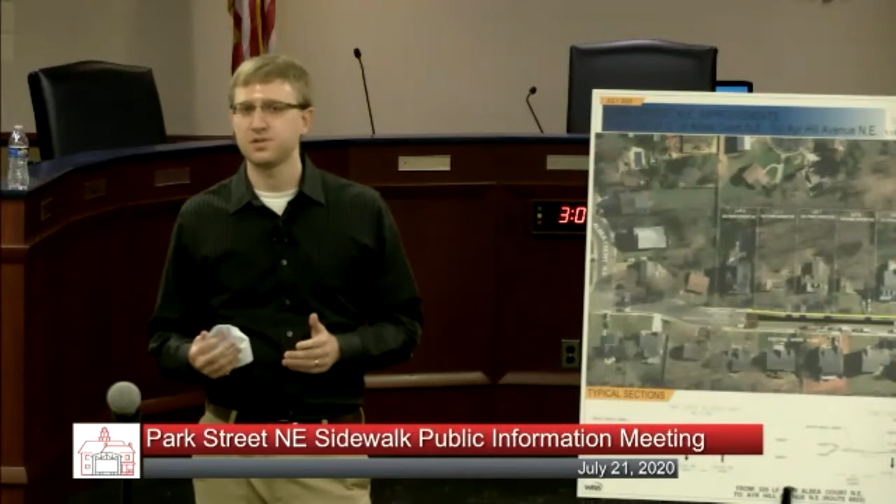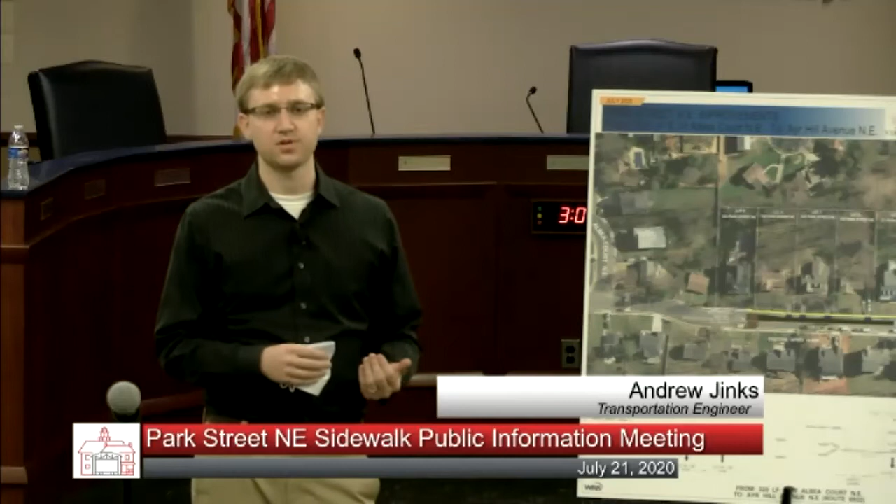Next question, from Nathan: will there be improvements to the sidewalk at the Ayr Hill and Park Street Northeast intersection? And can the power lines be moved underground during construction? To answer the second question first, moving power lines from aerial to underground is very expensive and costly, so that's not part of this project. For the intersection, we will be improving the curb ramp on the west side, but just that one side of the intersection. We won't be ripping up the concrete apron to install that, just improving the sidewalk and curb ramp in that quadrant.

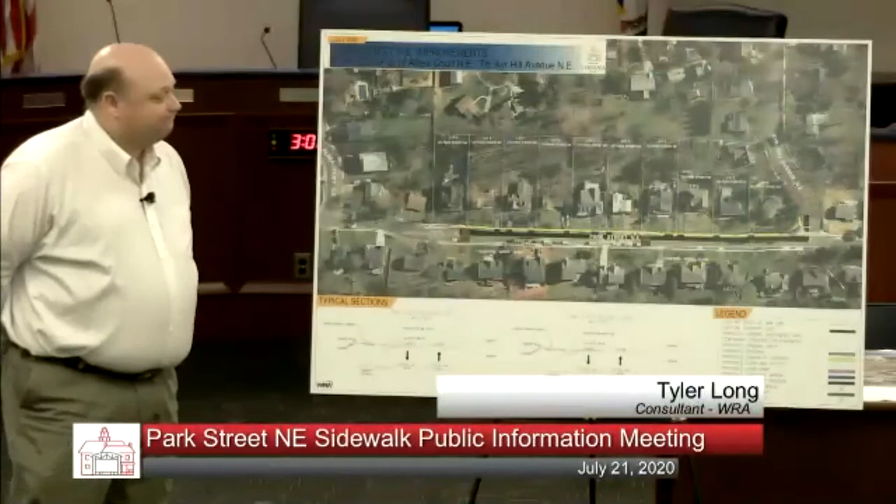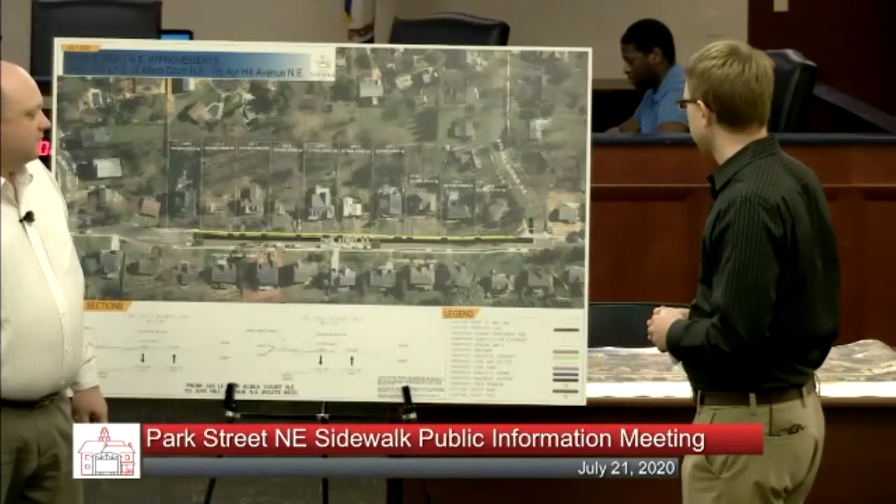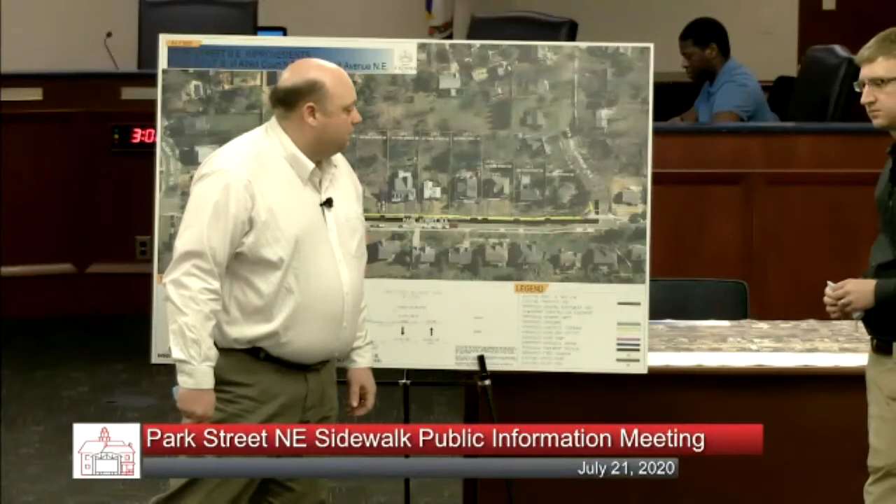Nathan asks: are you connecting the crosswalk across Park Street? The existing sidewalk on Park Street ends at the bottom right of the screen with nowhere to go. Will it connect? There's an existing curb ramp for a crossing, and we're lining up the new curb ramp to be in line with the existing one between these two driveways in this area. But there's no crosswalk or anything to safely get across during rush hour.

There aren't any marked crosswalks there currently. That's something the town could look into, even outside this project, so we can definitely look into adding a crosswalk and the markings as this project goes under construction. That intersection is pretty difficult for pedestrians during busy times and during Vienna events. I'm glad you let me know, we'll definitely look into that, I'll put it on my list to add pavement markings.

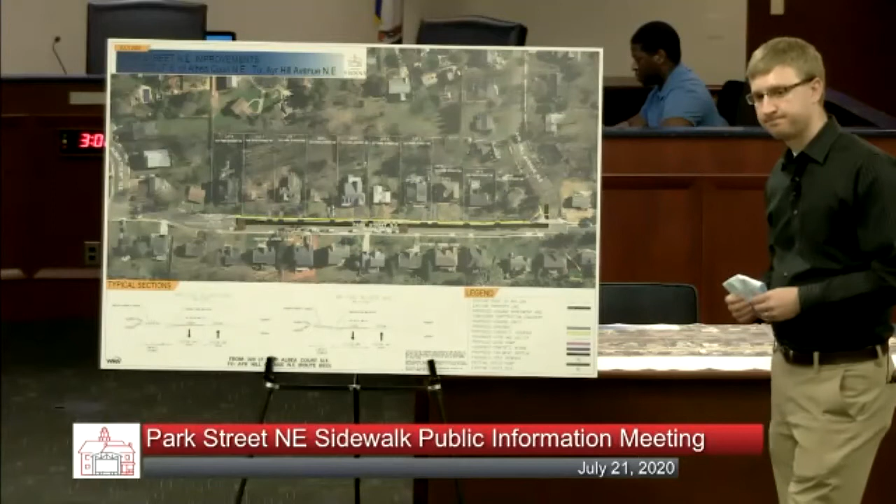Charles, was there any other questions? Not at the moment. Okay.

We'll be here for a while. I just want to have residents have some time to take a look at the exhibit. I'll check back in maybe 5 or 10 minutes to see if there are any additional questions. Could you remind everyone where they can find the packet of information?

Well, there are 2 places. First is the calendar event for this meeting. The other place is we've got this exhibit located on the project website. We are going to go through and update the project webpage for this. I know the dates on there are a bit old and outdated. We're going to update that, especially after we get our review comments back from VDOT and have a better idea of what the schedule is going to look like.

So please take some time to take a look at the exhibit and let us know if you have any questions.

So who is asking that question? This is for Michael Cooney, I hope I said your name right. My email should be part of either the project website or the calendar event. Send me an email, just a reminder of the question about the construction times versus the other developments being constructed, and I'll get back to you. But yeah, that's a good question. Thank you.

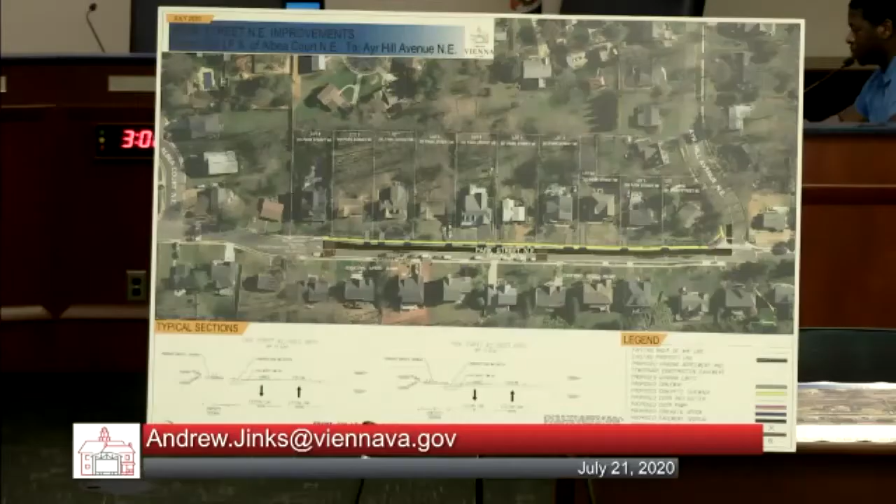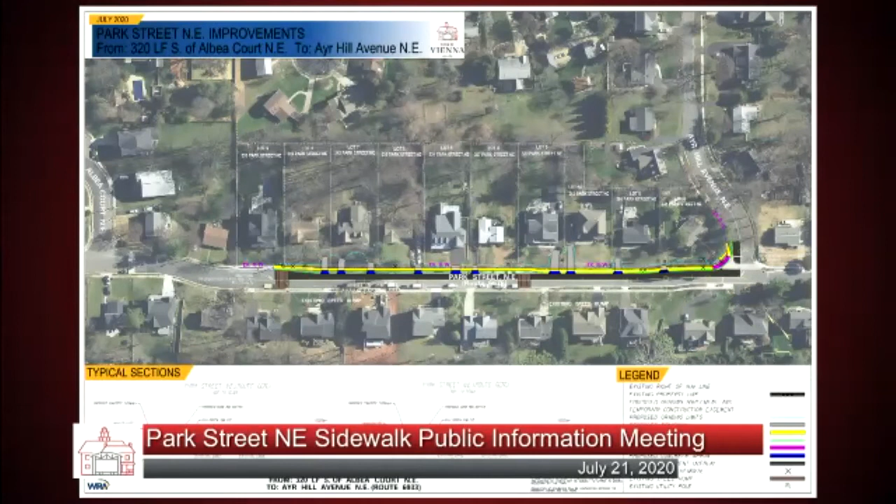Lisa would like to ask a question, so she's coming off mute. Hi, this is Lisa Cooney. I live across the street from Ayr Hill, right at the base of it. It looks like, when I went out there and walked this, that the trees that are going to be affected are all the ones along that house on the corner. Is that right?

Yeah, so currently 3 trees are showing being impacted on that property. But I know one of them we may possibly be able to save once we refine the design. At this point, we're showing 3 impacts.

Are those on Ayr Hill or Park Street, or both? Well, one of them is kind of right in the middle of the two, and the other two would technically be along Park Street. Okay.

At what point will you know the impact of the trees due to grading, etc.? At the time of construction, or at some earlier final design phase? It'll be at an earlier design phase. We're approaching 90% now. After VDOT goes through and does another review, we'll be able to finalize the design. At that point, we'll be able to know the exact impacts to the trees. Is that correct, Tyler? That's correct.

There's a follow-up question. It sounds like there would be time to discuss mailbox impacts as well, correct? Yes, we can discuss mailbox impacts when we have that one-on-one conversation with residents during the right-of-way phase. That's a good question, and we will be able to discuss that at that point as well.

This is from Michael. Has there been any analysis as to what effects this might have on parking during Viva Vienna? I don't think we've directly looked into that, but this design does not allow parking along the roadway there. That's something I could look into, understand how many people usually park there during the event, and get back to you. If you could send me an email reminding me of that question, I could get back to you. Thank you.

Did you say that it does or does not allow for parking? So along with the addition of the curb, which we need for drainage purposes, there would be no street parking along that side of the street.

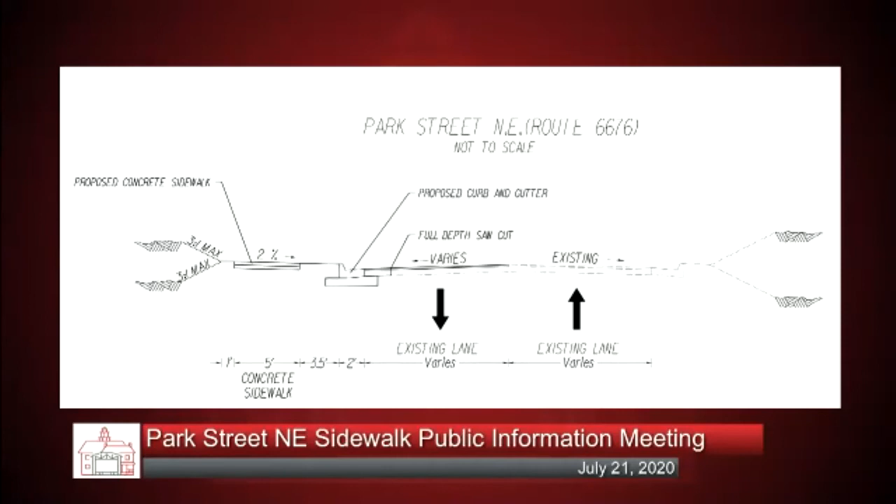I think Nathan wanted to speak. Hi, yeah, this is Nathan Giesman again. So on the no parking on that side of Park Street, is it going to be official with signs that there's no parking allowed on that side of the street?

We typically don't sign that, but that's something I could look into. With the way the road is laid out, it'll show just a single lane there, so I'll look into whether we need to add no parking signage along there. But with the addition, there are quite a few cars that park along the street right now, and I imagine there are going to be a lot of people who need to know that, who are likely not aware that this is going to be an issue.

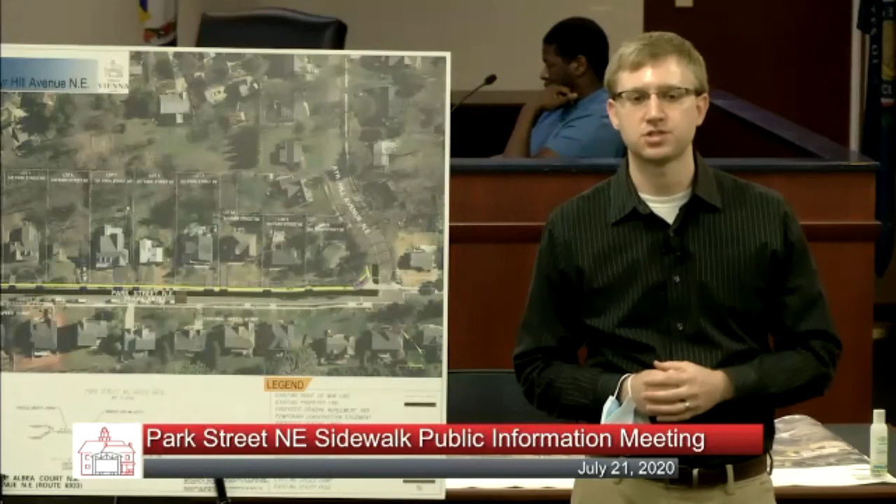But as I mentioned a couple of times, our next steps are to submit plans to VDOT within a week or two or so, which are going to be the right-of-way plan sets, the 90% plan sets. Once they review that and get back to us, we'll be able to start the negotiations with town, the residents that are impacted by this project. So look for us to be reaching out to you maybe in a month and a half, two months from now, just to get the project continuing to move forward.

I do apologize for various delays that have been a part of this project. The virus situation is one aspect, but the other aspect is that there's federal funds tied to this project. So there's certain checkboxes that we have to mark, certain hoops we have to jump through. And we're getting near the end, we're getting closer. So I do thank you for bearing with us. And thank you for joining us. It's just great that we were able to have this meeting through Zoom and proceed on with the project. So thank you very much.